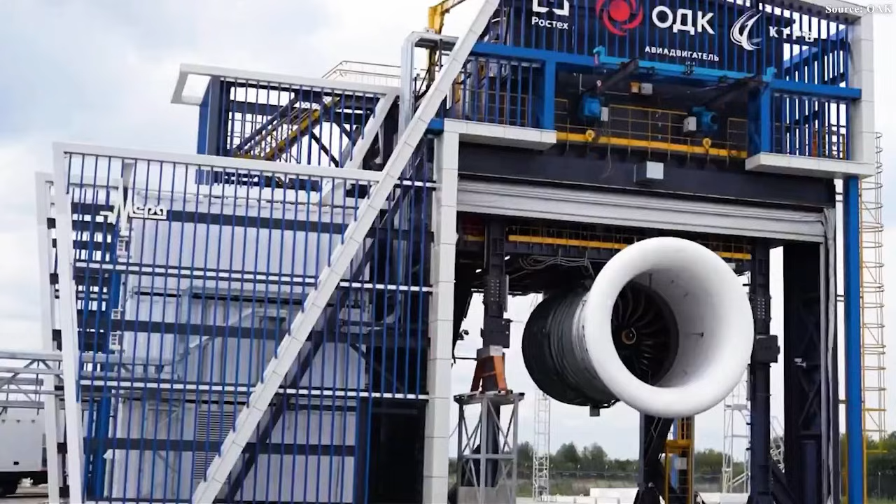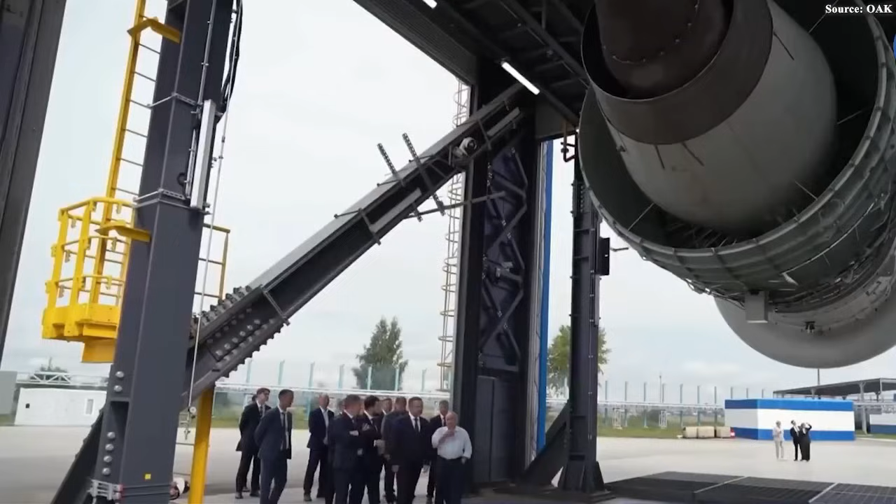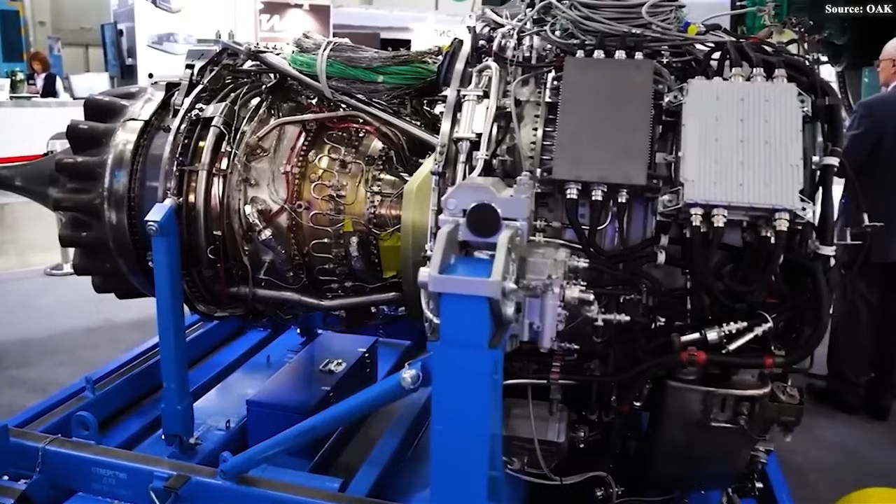What truly unsettles the West is a rival that rose under imperfect conditions. It's a country boxed in by sanctions, cut off from supply chains, and still pushing forward anyway. That country is Russia. For decades, large jet engines were considered an exclusive Western domain, controlled by a small club of manufacturers that set the rules for global aviation. But quietly, far from airshows and glossy marketing campaigns, Moscow has been working on something that challenges that assumption.

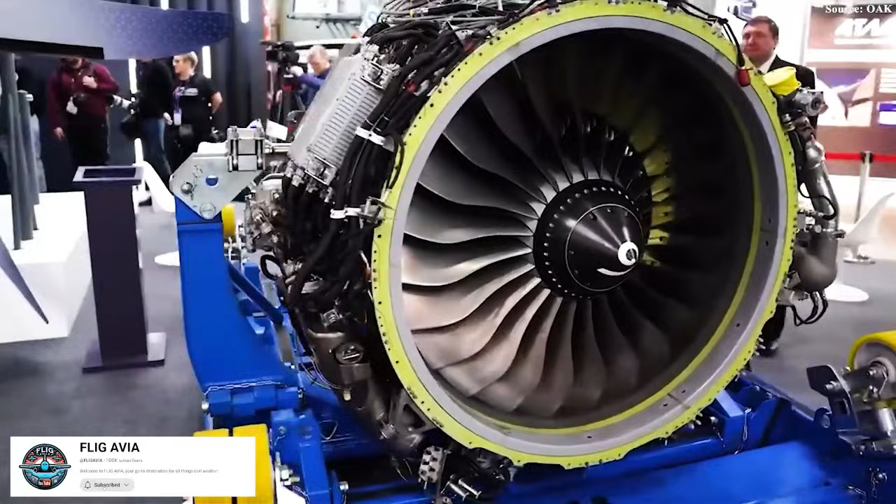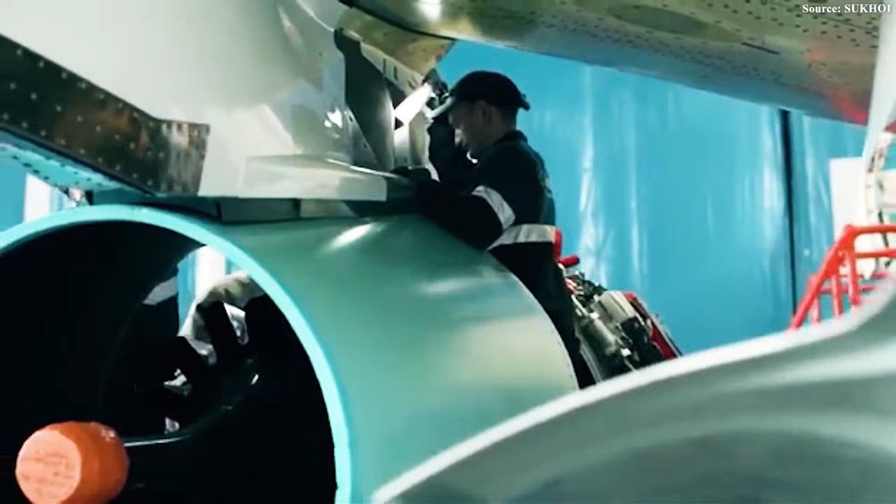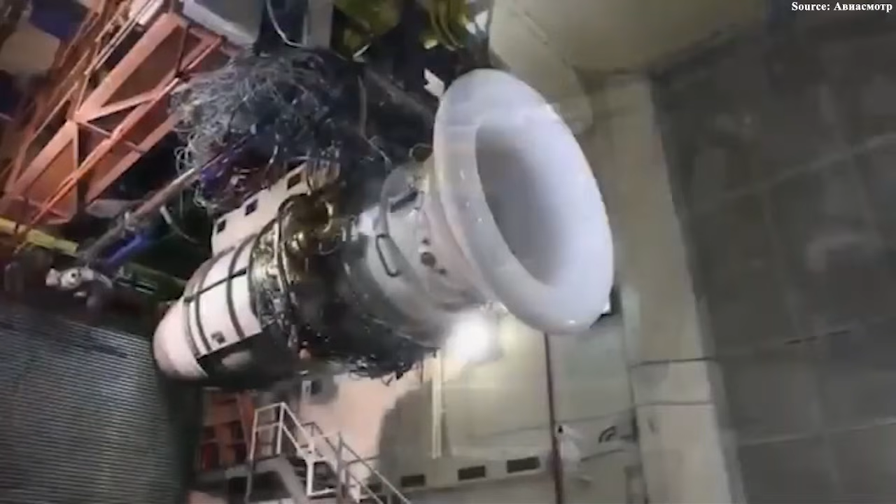Its name is PD-26. And while it hasn't flown yet, the very fact that it exists is already forcing uncomfortable questions. The PD-26 isn't just another engineering project. It's Russia's clearest attempt so far to reclaim independence in one of the most complex industries on Earth. Developed under the umbrella of United Engine Corporation, the engine is designed as a high-bypass turbofan, producing roughly 26 tons of thrust. That number matters.

It places the PD-26 squarely in the wide-body category, a space long dominated by Western engines powering aircraft from Boeing and Airbus. This isn't about regional jets or niche platforms. It's about competing where the stakes are highest. From the outset, the ambition behind PD-26 has been clear. It's intended to power future wide-body passenger aircraft, heavy freighters, and even large military transport planes.

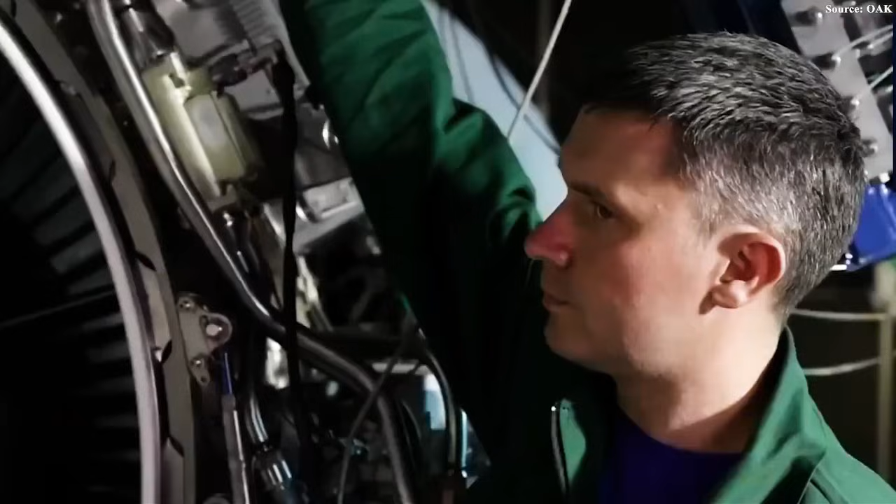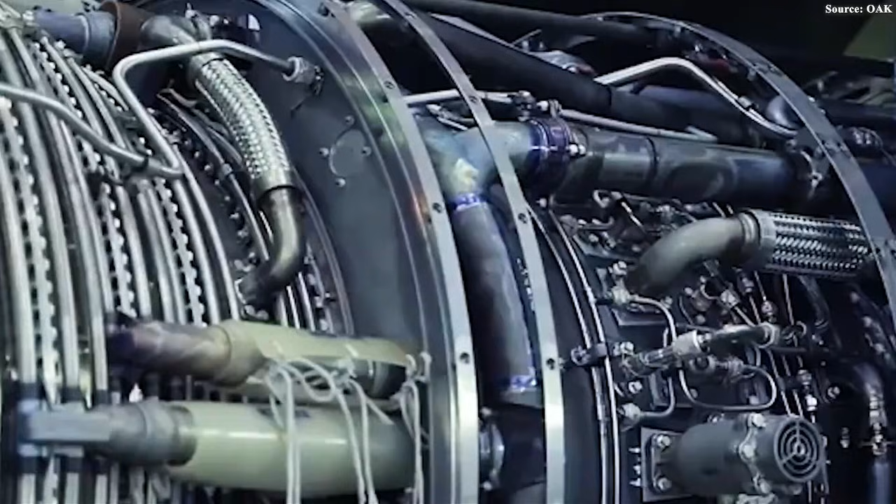With a bypass ratio estimated between 8.5 and 9.0 and a fan diameter approaching 3 meters, the design targets long-range efficiency rather than brute force. Engineers are aiming for a cruise fuel consumption improvement of up to 20% compared to older Russian engines like the PS90A. On paper, those numbers would place it much closer to modern Western standards than anything Russia fielded before. But the more interesting part is how they're trying to get there.

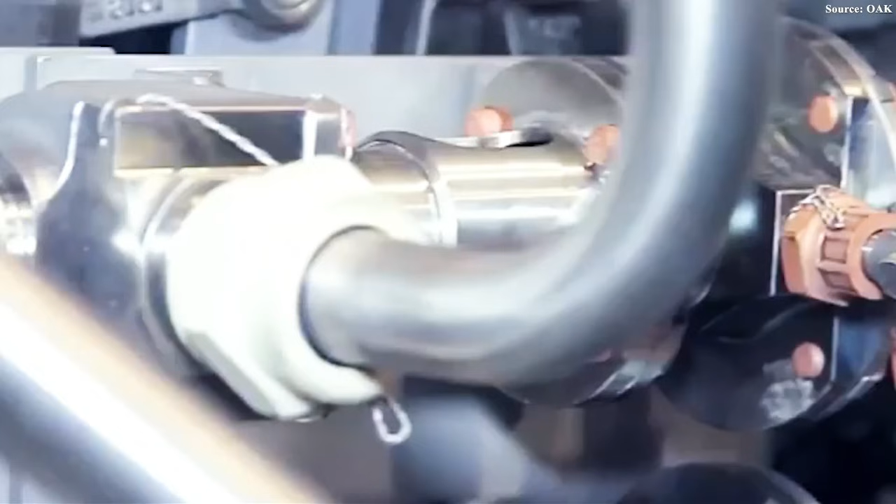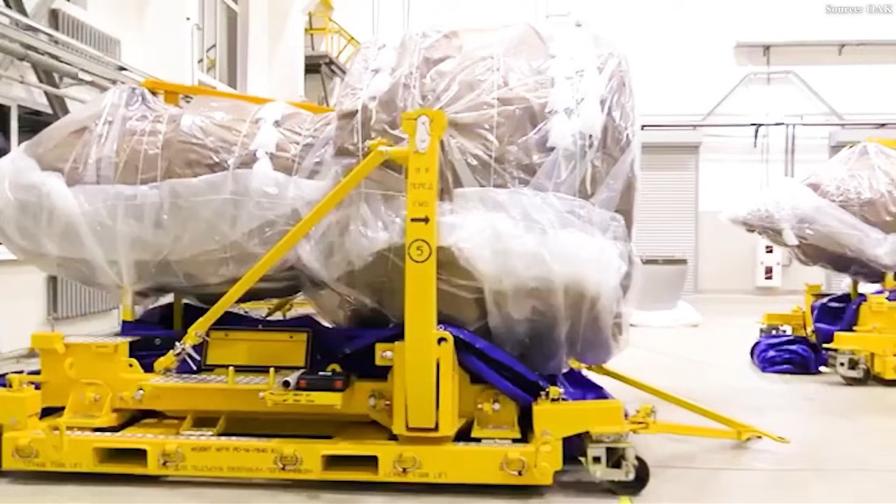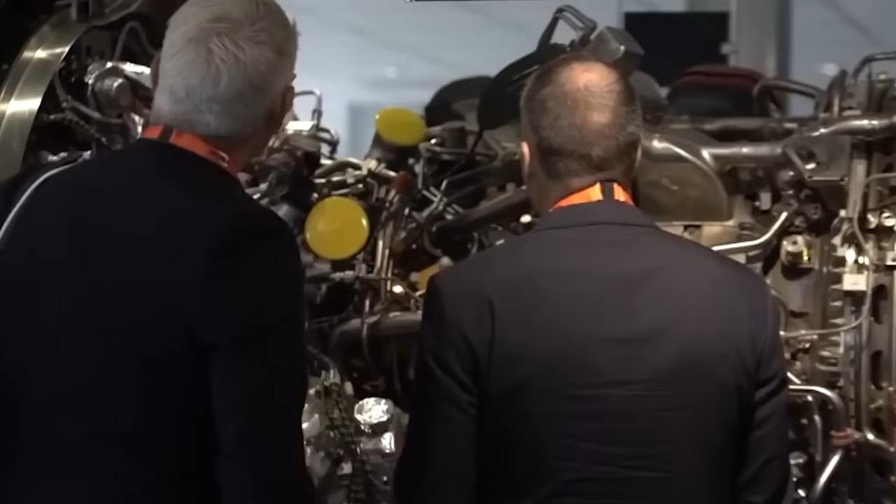Unlike many past Russian programs, PD-26 isn't being built from scratch. Instead, it's a calculated blend of what already works. Its DNA traces back to the PD-14, a smaller engine that achieved certification and now flies on the MC-21. That program gave Russian engineers something they hadn't had in decades: real, modern experience with civilian certification, composite fan blades, digital engine controls, and high-temperature turbine materials.

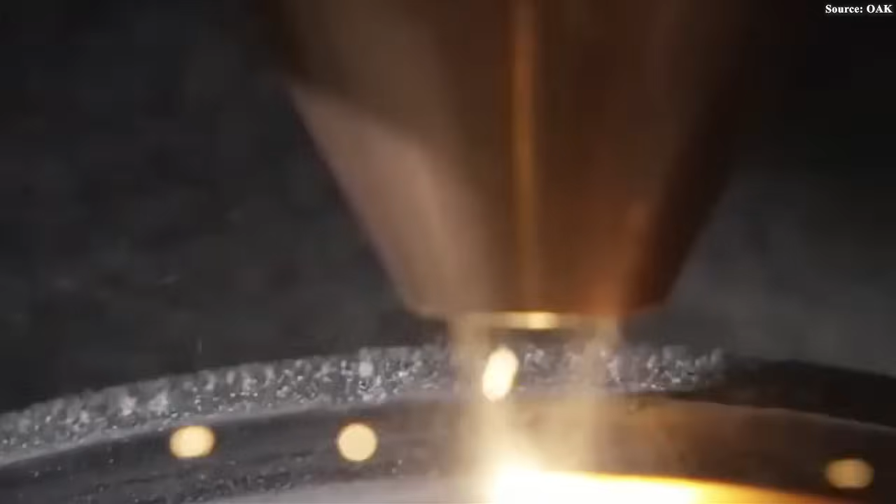At the same time, PD-26 borrows heavily from the much larger PD-35 program, especially its gas generator core and advanced turbine technologies. The result is a modular design meant to scale efficiently across multiple thrust classes. And that decision wasn't just technical, it was strategic. As of now, PD-26 remains in the pre-prototype phase. Ground testing is expected in the late 2020s, with flight testing planned shortly after. Even under optimistic scenarios, certification wouldn't come until the early 2030s.

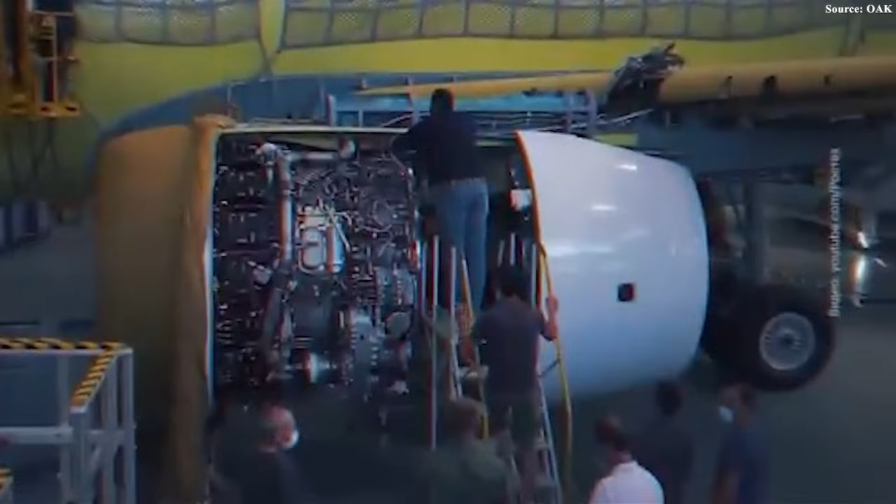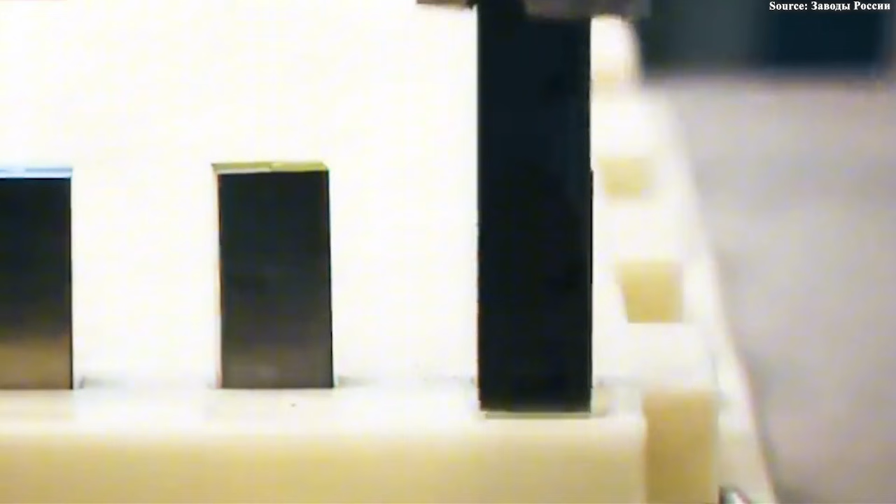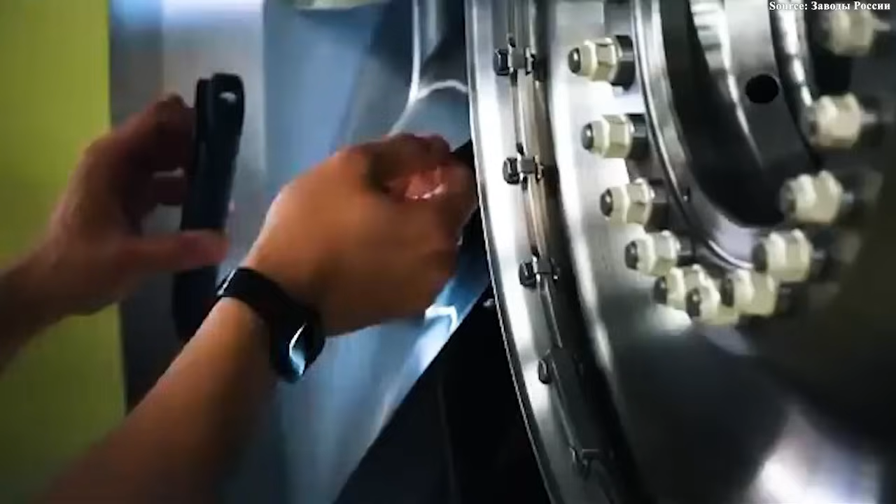Yet despite those timelines, the engine is already being discussed as if it were inevitable. That's because PD-26 is less about speed and more about survival. And to understand why, you have to look backward. Russia's jet engine industry didn't start from nothing. During the Soviet era, it produced world-class designs like the D-30 and AL-31, engines that powered everything from civilian airliners to frontline fighters. But the collapse of the Soviet Union in 1991 shattered that ecosystem.

Funding evaporated. Skilled engineers left. Factories aged without modernization. By the 2000s, Russia had become deeply dependent on foreign suppliers, relying on Ukraine for helicopter engines and Western firms like Pratt and Whitney and Safran for critical civil aviation components. That dependence worked until it didn't. The turning point came in stages. First, in 2014, when sanctions following Crimea exposed how fragile Russia's supply chains really were.

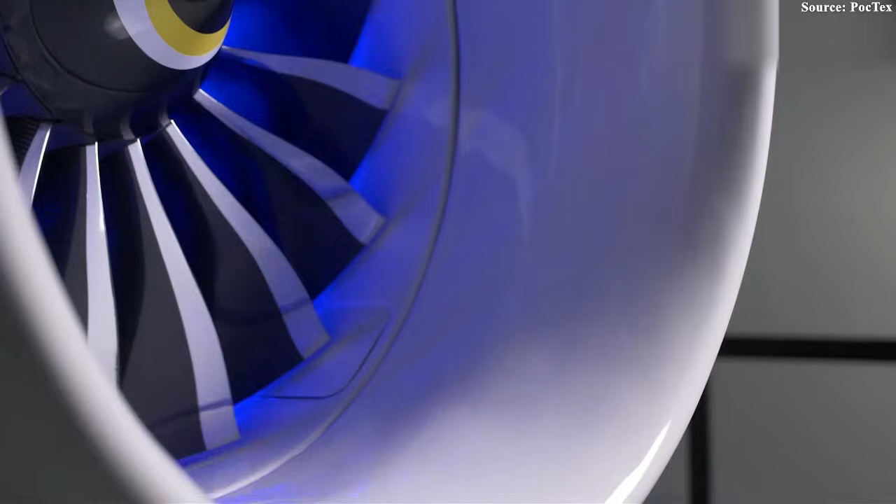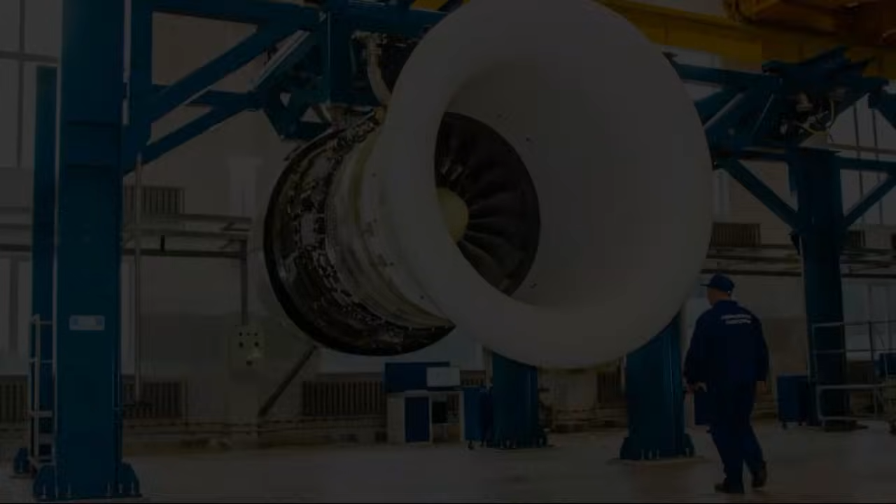Then, in 2022, when the scale of restrictions exploded. Export controls cut off access to advanced machine tools, electronics, and precision components almost overnight. Estimates suggested that up to 70% of imported inputs used in Russian aviation programs suddenly became unavailable. Civil aviation was hit immediately. Aircraft were grounded for lack of spare parts. Leasing agreements collapsed, and at the same time, military demand surged.

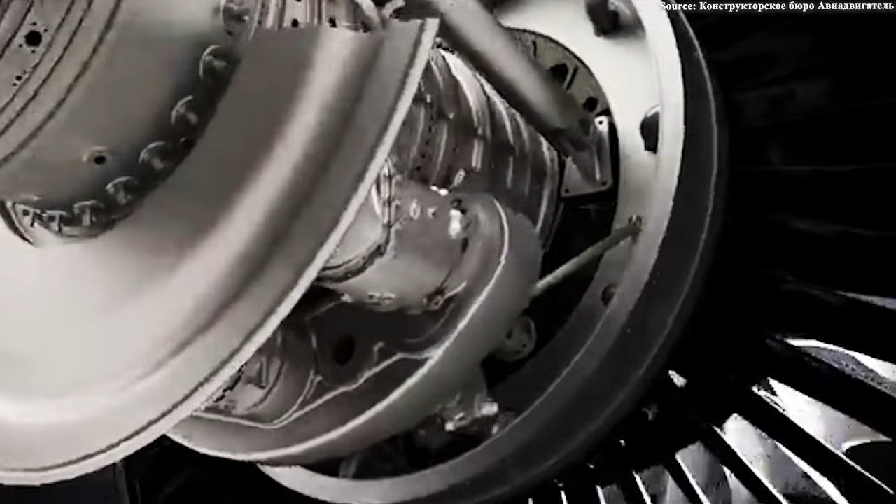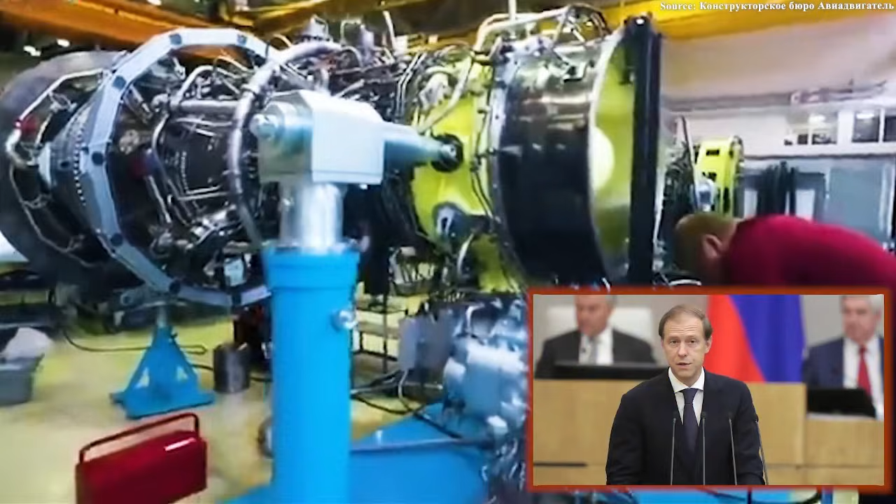Transport aircraft like the IL-76 and IL-96 became more important than ever, supporting logistics under wartime conditions. That pressure forced Moscow to confront a hard truth. Import substitution was no longer a policy preference. It was a necessity. In public statements, Denis Manturov made that shift explicit.

Calling for full localization in defense industries without sacrificing quality. It was a bold demand, and many inside Russia quietly doubted it was achievable. But the direction was set.

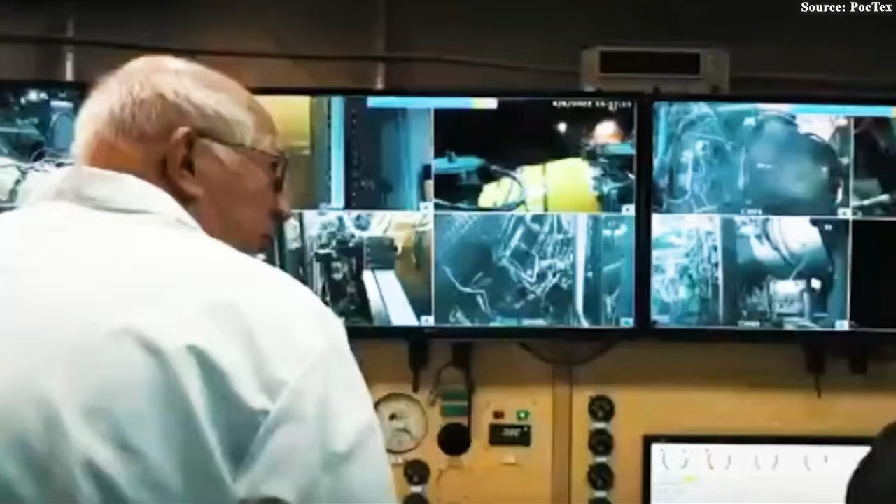The PD-35 program was supposed to be the crown jewel of this revival. Launched in the mid-2010s, it targeted an enormous thrust class of up to 35 tons and was intended to power the joint Russia-China CR929 widebody. The engine incorporated more than 20 advanced technologies, from ceramic matrix composites to next-generation digital controls.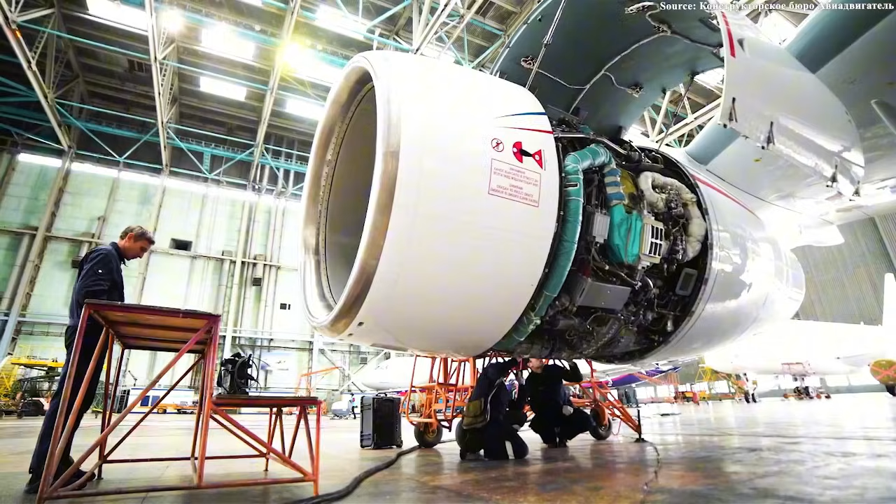In 2023, its gas generator core successfully ran on a test bench in Perm, proving that the core technologies worked, but geopolitics intervened. The CR929 partnership unraveled, and the justification for such a massive engine weakened. That's where PD-26 comes in. Instead of abandoning the investment, Russian engineers adapted.

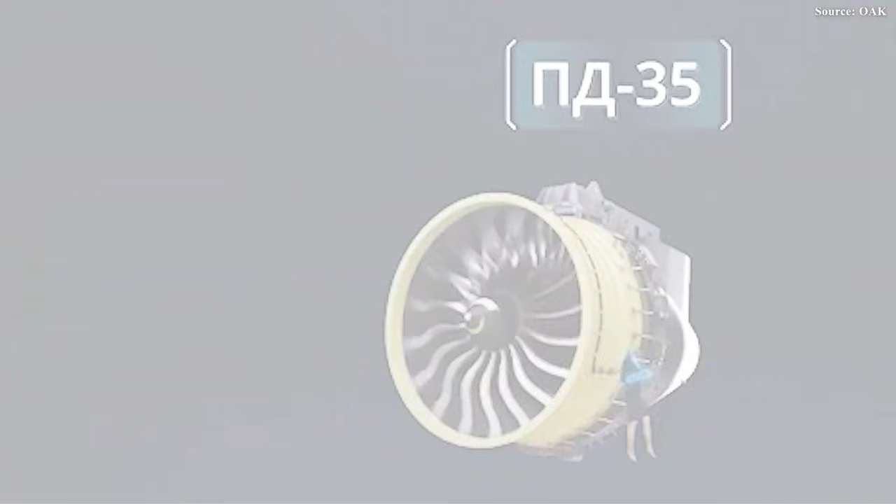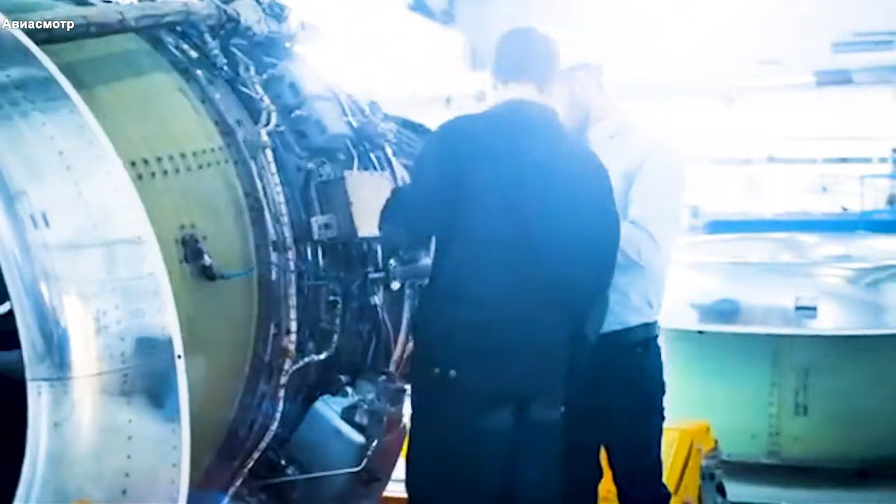They scaled down the PD-35 core, paired it with a smaller fan and low-pressure turbine, and created a more practical engine tailored to aircraft Russia actually plans to build. The modular approach promised to cut development costs nearly in half and shorten certification timelines. In other words, PD-26 wasn't born from ambition alone, it was born from compromise.

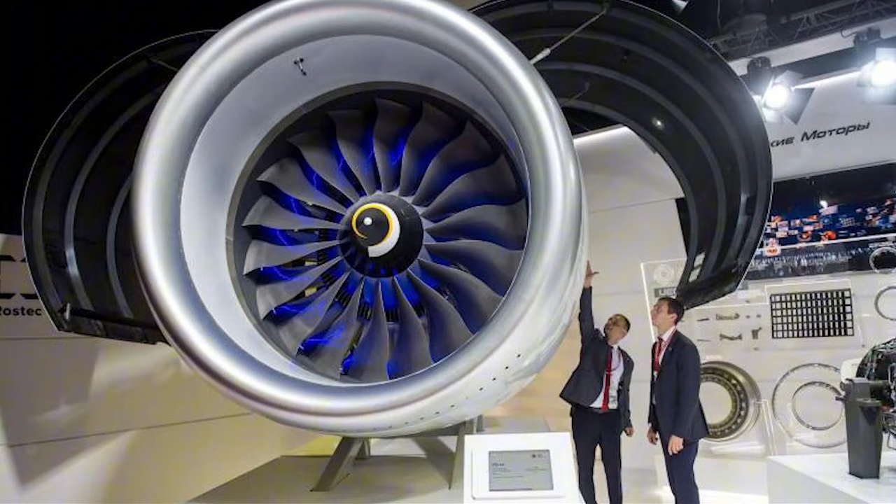Officially, the engine was unveiled in 2025. Within weeks, it received direct political backing, transforming it from a technical derivative into a strategic priority. The message was clear. This engine would move forward, delays or not.

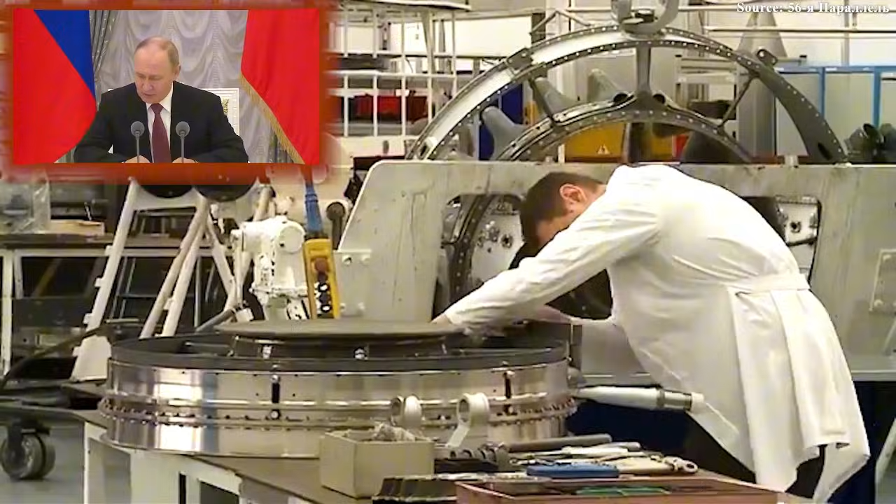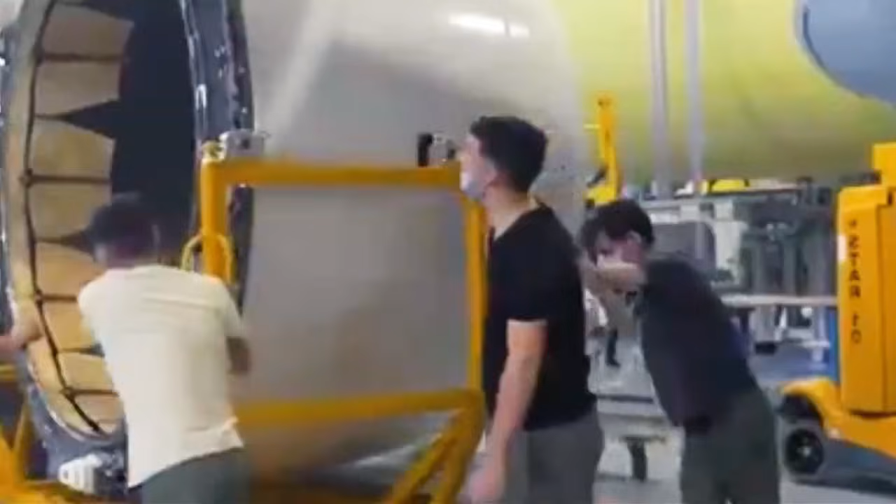Plans began circulating for flight testing on modified IL-76 platforms, using a mixed configuration with older engines on 3 pylons and the PD-26 on the 4th. It's a cautious approach, but also a telling one. Russia isn't trying to leap ahead. It's trying not to fall out of the race entirely.

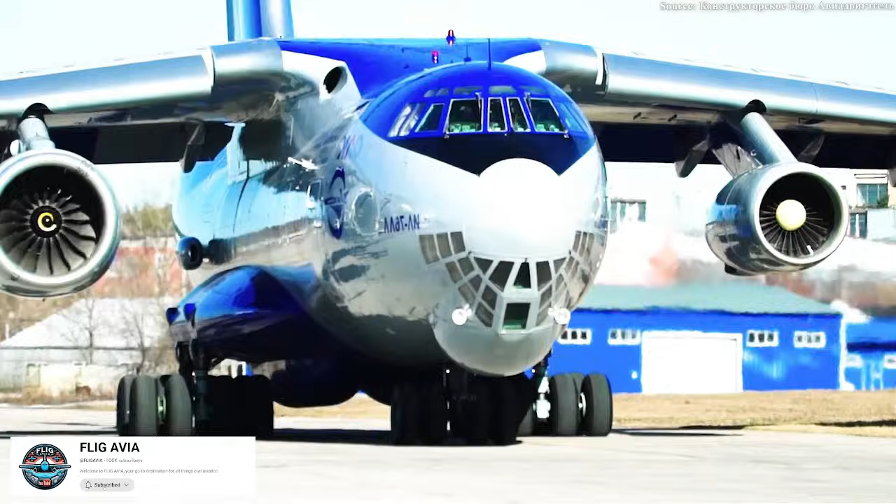Still, the challenges are immense. Production capacity remains a bottleneck. Even the PD-14, Russia's most successful modern civil engine, has struggled to reach more than a few dozen units per year. Precision manufacturing, especially for turbine blades and high-temperature components, remains constrained by sanctions and aging equipment.

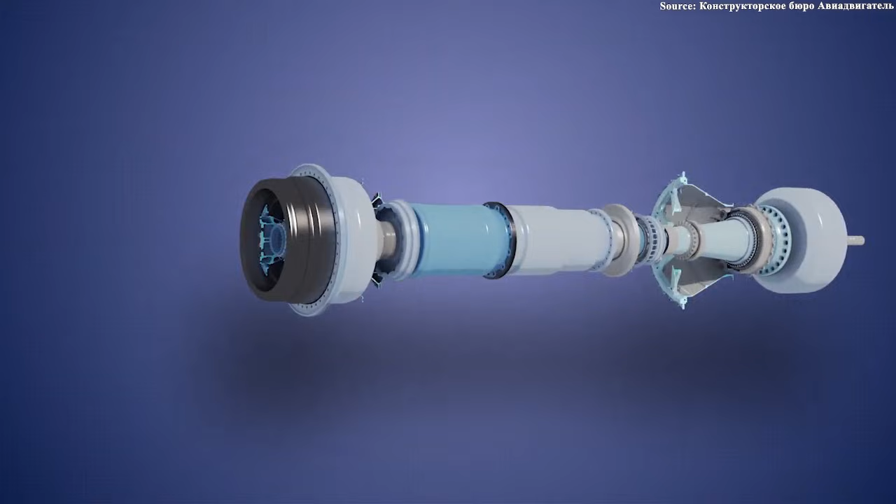Skilled labor shortages persist as experienced engineers retire or leave. These aren't minor hurdles. They're structural limits that no amount of political pressure can fully erase. And yet PD-26 continues, because its value isn't measured only in thrust or efficiency. Geopolitically, it signals defiance of Western efforts to isolate Russian high-tech industries. Economically, it's meant to stabilize an aviation sector worth billions and preserve industrial jobs.

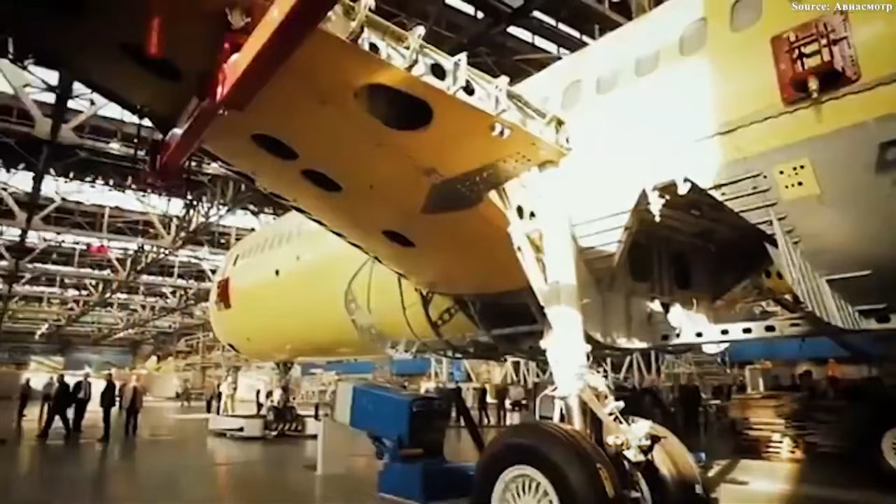Militarily, its dual-use design supports heavy airlift capabilities Russia cannot afford to lose. Critics argue it's symbolic, a prestige project in a strained economy. Supporters claim it proves sanctions have forced innovation rather than collapse.

In the end, PD-26 represents something larger than itself. It's a test of whether a modern, highly complex technology can be sustained under long-term isolation. Not whether Russia can surpass the West, but whether it can remain technologically relevant at all. The engine's first flight, whenever it happens, won't just be an engineering milestone. It will be a verdict on an entire strategy.

And until that verdict arrives, PD-26 remains suspended between ambition and reality, quietly challenging assumptions that many thought were settled long ago. That tension between ambition and reality is exactly where the PD-26 story becomes more than an aviation project. It becomes a window into how Russia is reshaping itself under pressure.

What looks like a technical decision on paper is actually part of a much broader shift, one that economists and strategists increasingly describe as a fortress economy. In this model, efficiency takes a backseat to endurance and access is replaced by control. The PD-26 fits neatly into that logic.

Geopolitically, the engine sends a message far beyond Russia's borders. By pressing ahead with a high-thrust turbofan under sanctions, Moscow is signaling to non-Western partners that advanced aerospace development doesn't have to run through Washington or Brussels.

This narrative is especially aimed at countries within the BRICS bloc and others navigating their own uneasy relationships with the West. Even though the joint wide-body ambitions with China faded, the underlying idea remains: technological autonomy as leverage. PD-26 becomes a proof of concept, not necessarily of superiority, but of independence.

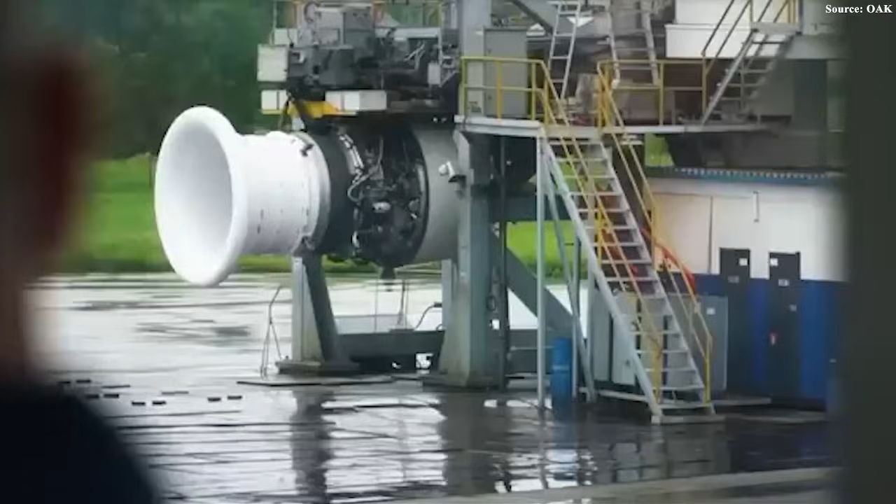Economically, the stakes are just as high. Russia's civil aviation sector has been hit from every angle: shrinking fleets, grounded aircraft, and rising maintenance costs. Airlines have been forced to cannibalize planes for spare parts, a practice that buys time but not stability.

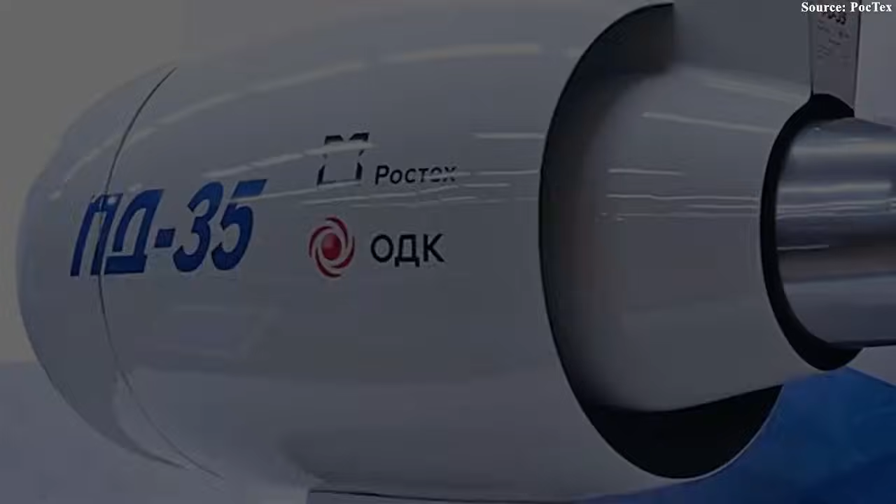The PD-26 is meant to anchor a longer-term recovery, one tied to a broader push to field hundreds of domestically built aircraft over the next decade. On paper, this would keep factories running, preserve skilled jobs, and reduce reliance on foreign suppliers. In reality, it hinges on whether production rates can ever match political promises.

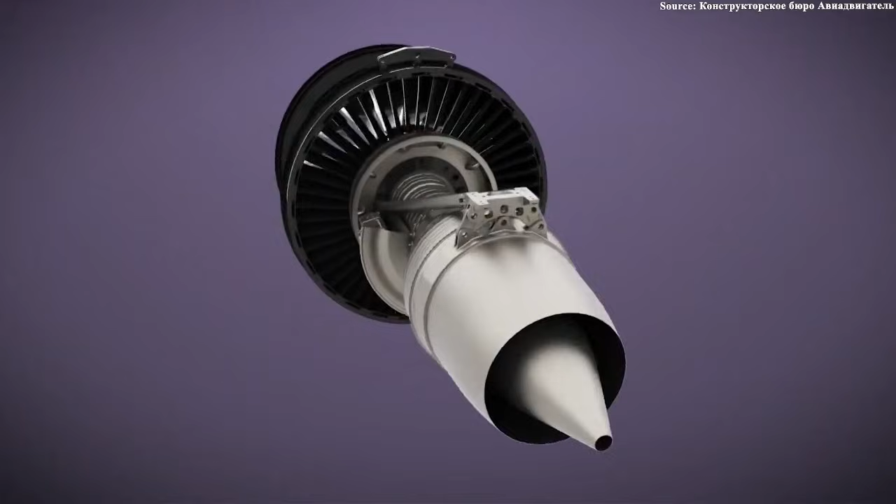Then there's the military dimension, which often goes unstated but is impossible to ignore. Heavy airlift has become a strategic priority, especially as operational demands increase and legacy platforms age.

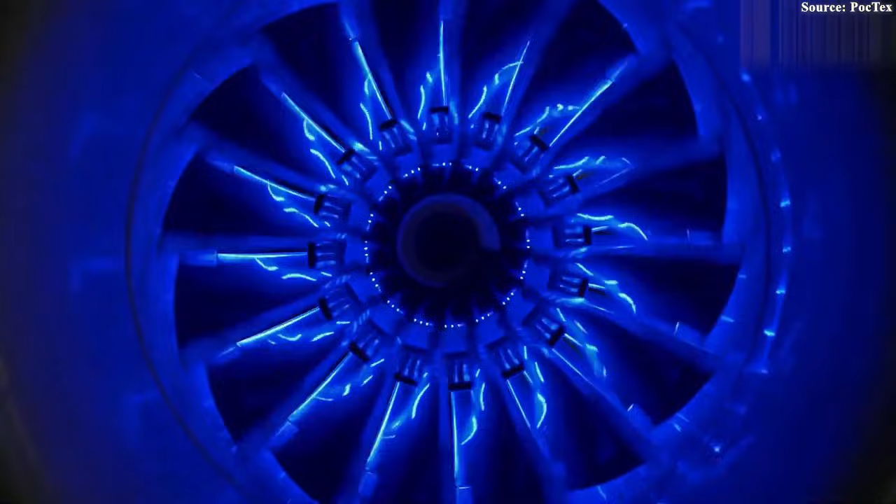Still, skepticism persists, even within Russia. Analysts point out that sanctions didn't just remove access to components, they disrupted entire ecosystems of quality control, certification, and supplier accountability. Rebuilding that from scratch is slow and expensive. Parallel imports and indirect supply routes can fill some gaps, but they don't replace deep industrial integration.

And while officials often highlight breakthroughs, production statistics tell a more restrained story. Output growth remains uneven, and delays are quietly acknowledged behind closed doors. This is where PD-26 becomes a gamble, not a reckless one, but a calculated risk. By scaling down from the ambitious PD-35 rather than starting over, Russia is betting that incremental progress can outpace isolation.

The modular approach allows lessons from one engine to feed directly into another, spreading risk across programs. If PD-26 succeeds even partially, it could stabilize the entire domestic engine family. If it stalls, it may expose just how narrow the margin has become.

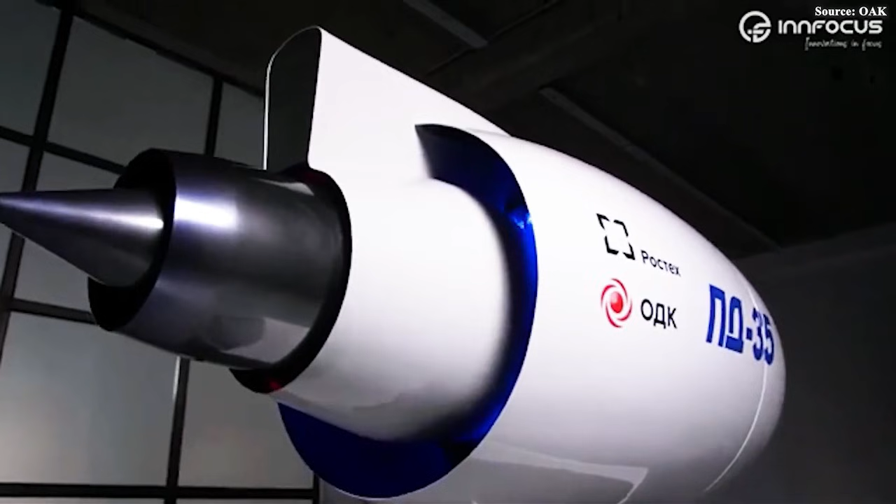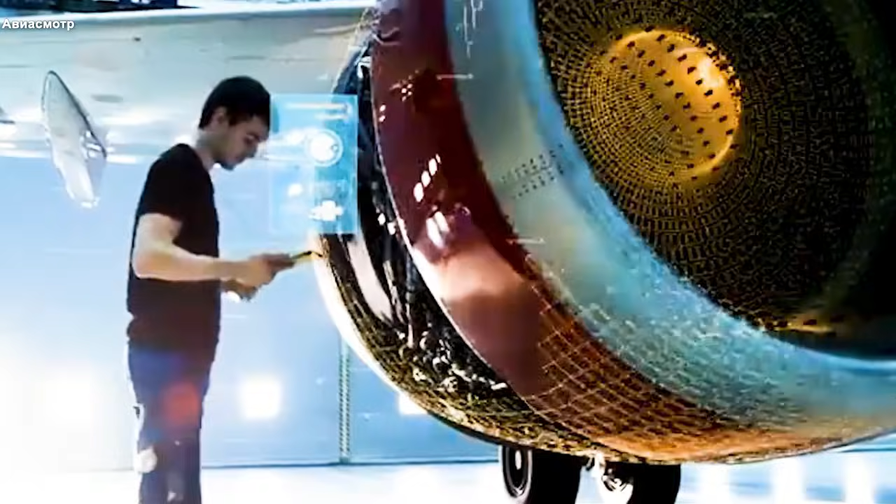What's striking is how little room for retreat remains. Unlike earlier programs that could be shelved or delayed without immediate consequences, PD-26 is now tied to national strategy. Funding, political credibility, and industrial survival are all wrapped into its outcome. That pressure cuts both ways. It accelerates decisions, but it also magnifies failure.

In the coming years, attention will shift from announcements to test data. Bench runs, thermal limits, vibration profiles, and fuel efficiency curves will matter far more than speeches. A single successful flight test will be celebrated as a breakthrough. A setback will raise questions that can't be dismissed as propaganda. The world won't need to guess how this story is going. The results will be visible, measurable, and hard to spin.

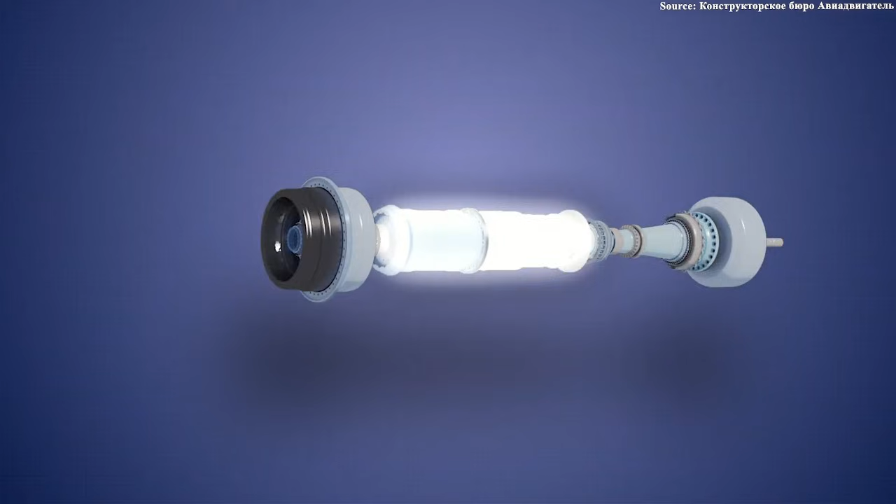So when people ask what truly makes the West uneasy, it may not be the PD-26 itself. It's the precedent it represents. A reminder that pressure doesn't always produce collapse. Sometimes it produces adaptation. Whether that adaptation is sustainable is still an open question. But one thing is already clear. The era where Russia's aerospace ambitions could be dismissed outright is over. The real test isn't whether PD-26 flies. It's what happens if it does.

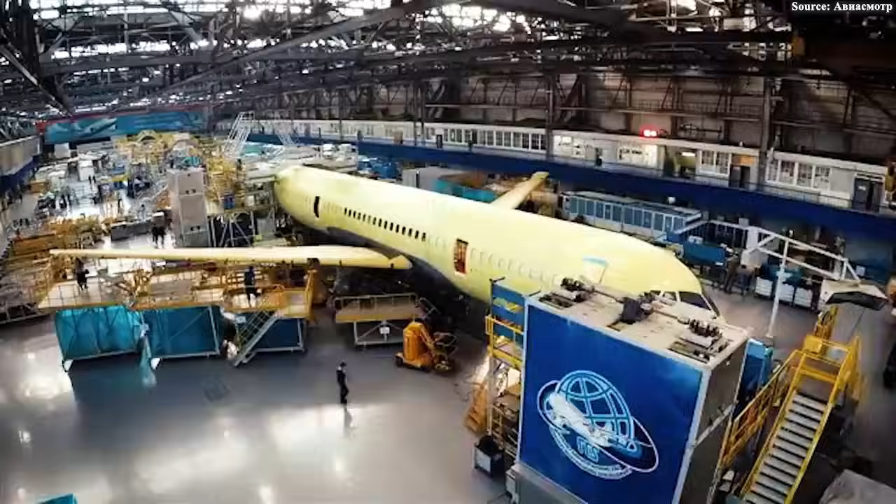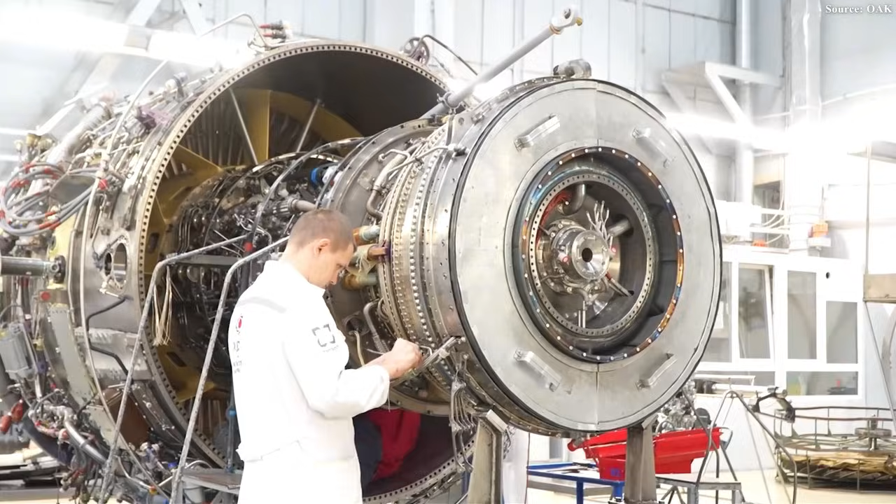And if it does fly, the consequences won't be immediate or dramatic. There won't be a sudden collapse of Western engine makers or a reshuffling of the global aviation order. What will change is something quieter, but far more important: assumptions. For decades, aerospace power has been tied to access. Access to global supply chains, to Western certification systems, to precision tooling scattered across multiple countries. PD-26 challenges the idea that losing that access automatically ends the game.

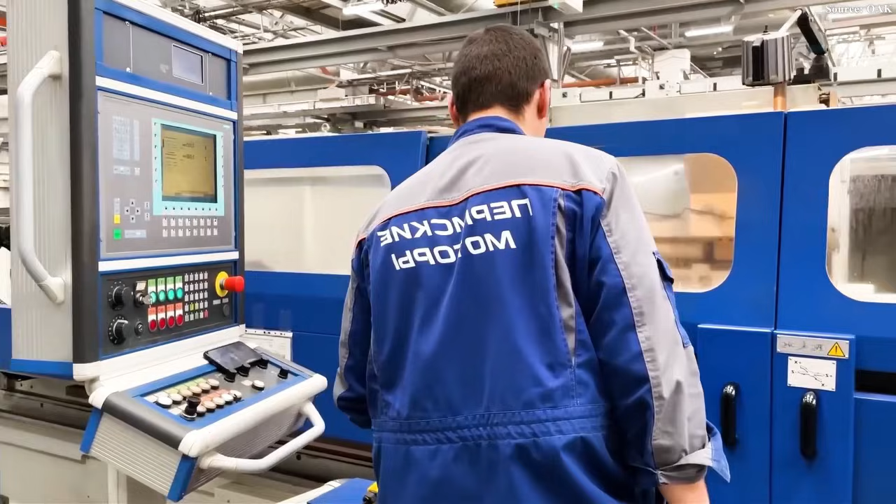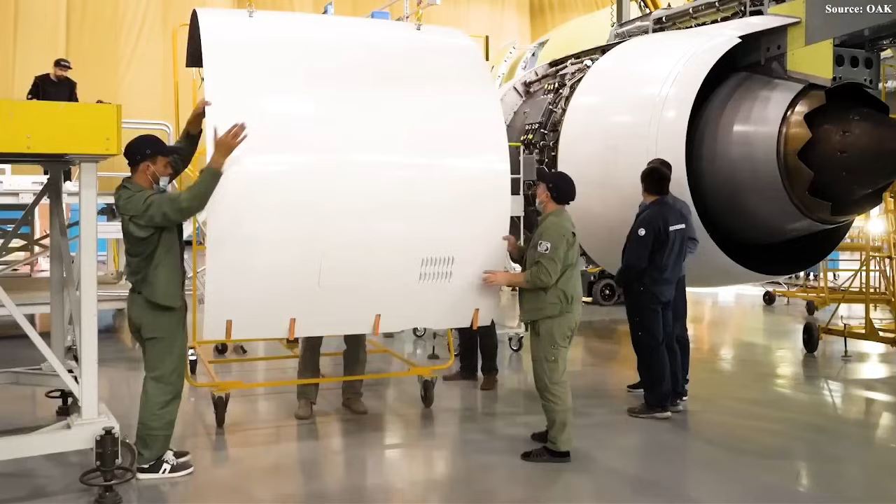That's why many analysts argue the real impact of PD-26 won't be measured in sales or exports, at least not at first. It will be measured in confidence. Confidence inside Russia's own industrial base that complex systems can still be built domestically. Confidence among non-Western states watching closely, wondering how vulnerable their own industries might be under pressure. And confidence, or lack of it, within Western policy circles about how effective long-term technological isolation truly is.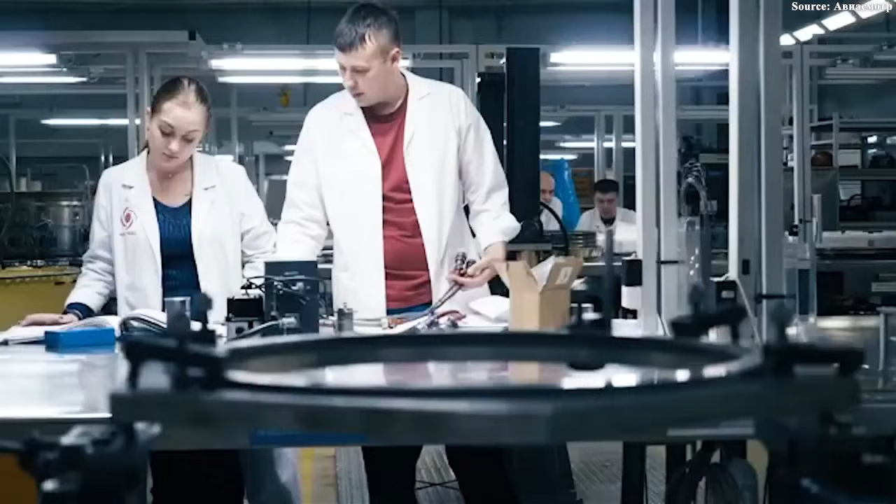At the same time, expectations around PD-26 are being carefully managed. Officials no longer speak in terms of rapid dominance or global market takeover. Instead, the language has shifted toward reliability, sufficiency, and continuity. That change matters. It signals a recognition that the goal is no longer to outcompete the West on its own terms, but to survive outside those terms altogether. In that sense, PD-26 isn't a challenger to Western engines like the GE90 or Trent families. It's an alternative path.

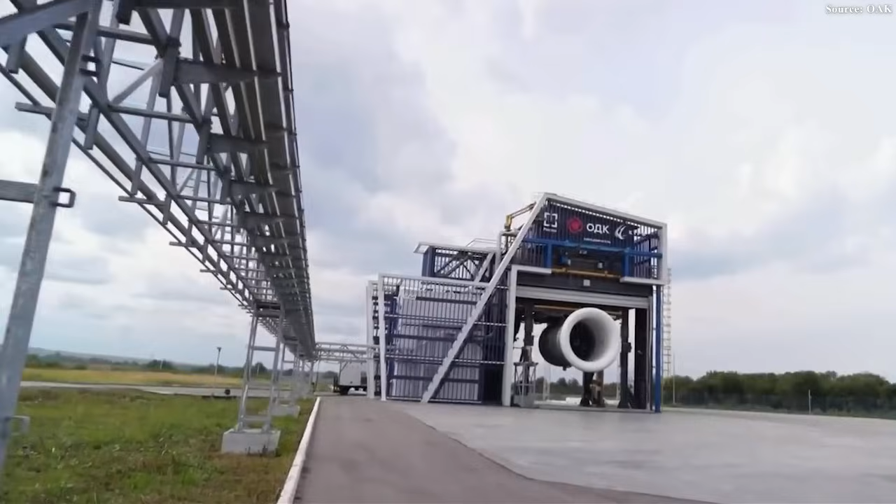There's also a generational aspect that often goes unnoticed. Many of the engineers working on PD-26 are part of a cohort that entered the industry during the PD-14 program. They didn't inherit Soviet-era design philosophies directly. They learned within a modern certification environment, constrained, imperfect, but closer to international standards than anything Russia had before. PD-26 is their first chance to apply those lessons at scale. Whether they succeed or stumble will shape the next 20 years of Russian engine design. Still, the risks remain unavoidable.

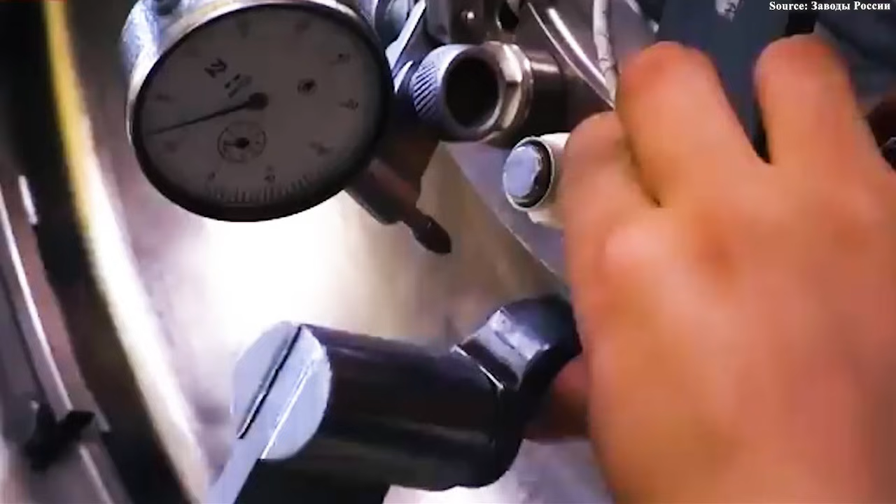If certification drags on into the mid-2030s, the engine may enter service already technologically dated. If production never scales beyond small batches, its strategic value shrinks. And if quality issues emerge under operational stress, confidence could evaporate quickly. These aren't hypothetical concerns. They are the same pitfalls that have plagued complex aerospace programs worldwide, even under far more favorable conditions. Yet, despite all of this, PD-26 keeps moving forward.

Slowly, methodically, without the fanfare that usually accompanies aerospace breakthroughs. That, in itself, is telling. It suggests a program no longer driven by image, but by necessity. A project designed not to impress the world, but to ensure that Russia can still move people, cargo, and power through the air on its own terms.

In the end, PD-26 may never become a household name. It may never power aircraft seen at major international airports. But its significance doesn't depend on visibility. It depends on function. If it works, even imperfectly, it will validate a strategy built on endurance rather than integration. If it fails, it will expose the hard limits of isolation in an industry that tolerates very little margin for error. Either way, the message is already out there.

Russia isn't waiting for conditions to improve. It's adapting to the conditions it has. And PD-26 stands as one of the clearest symbols of that adaptation. Not as a declaration of victory, but as a statement of intent. The kind that doesn't fade quickly, no matter how the final chapter is written.

That intent becomes even clearer when you look at how quietly this program is being handled. There's no glossy rollout, no exaggerated timelines, no claims that the PD-26 will instantly rewrite aviation history. Instead, the messaging is restrained, almost cautious, and that restraint itself is unusual. It suggests the people closest to the program understand exactly how narrow the margin for error is. In aerospace, especially at this level, promises are cheap.

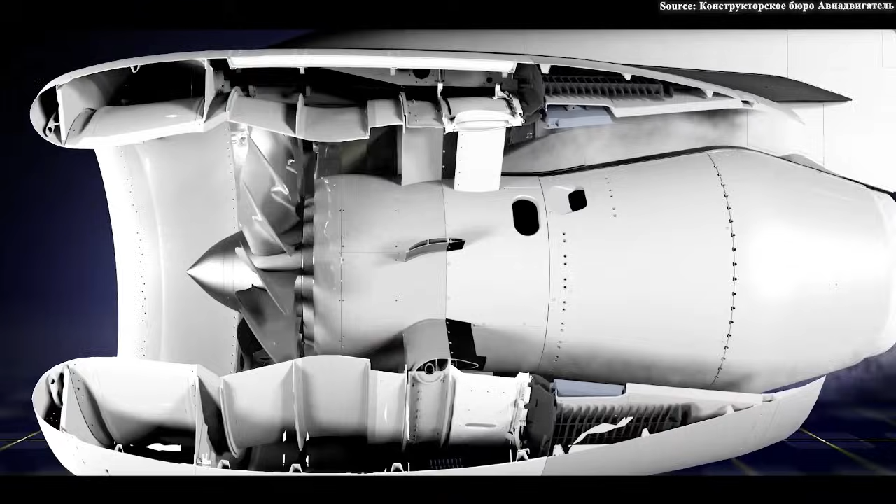Data isn't. What happens next will unfold in stages that don't make headlines. Metallurgy tests, stress cycles, long-duration bench runs designed to expose flaws rather than hide them. Each of these steps will determine whether PD-26 remains a political symbol or becomes an operational tool. And unlike consumer technology, there's no shortcut here. You can't rush an engine that's expected to operate for tens of thousands of hours without failure.

Another overlooked factor is certification. Even if Russia certifies the PD-26 domestically, international acceptance is a different matter entirely. Without validation from Western aviation authorities, the engine's export potential remains limited. That doesn't make it useless, but it does redefine its role. PD-26 isn't being built to conquer global markets in the near term. It's being built to ensure continuity at home, to keep aircraft flying, factories operating, and logistics moving without asking permission.

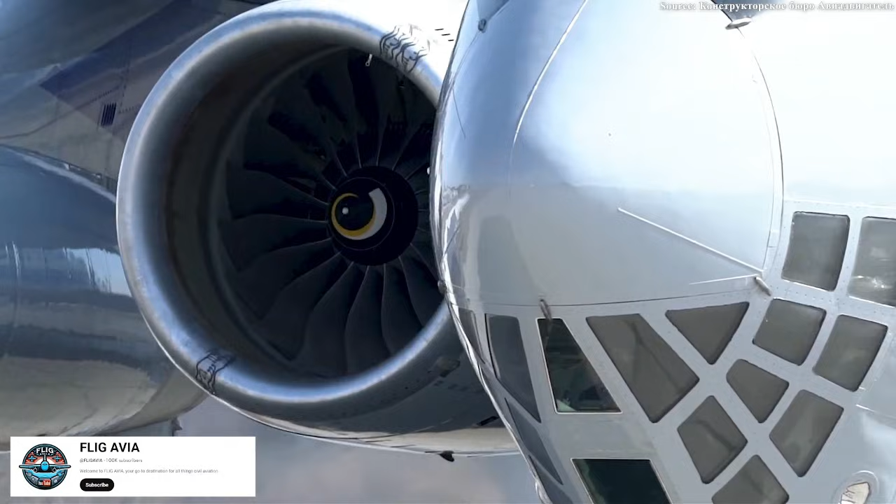This is where critics often miss the point. They frame PD-26 as an attempt to catch up to the West, but that's no longer the real objective. The objective is insulation, resilience, the ability to function when access is denied. By that metric, even a technically imperfect engine can be strategically successful if it meets minimum reliability and production thresholds.

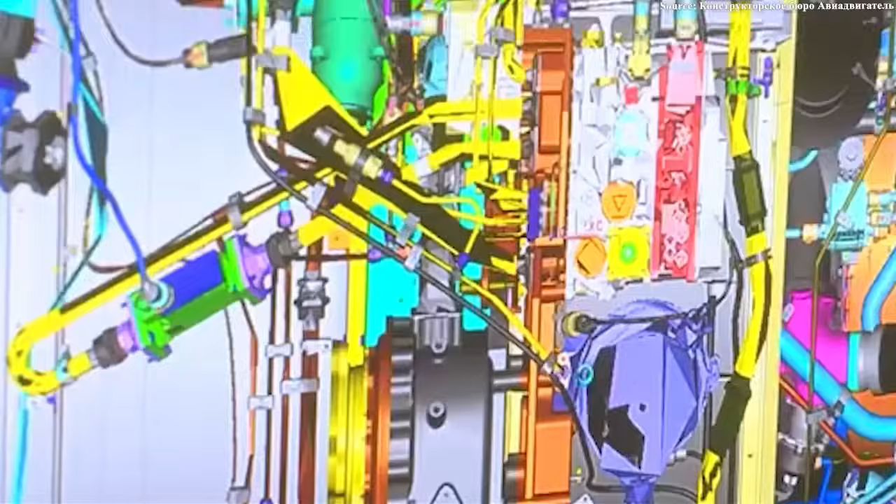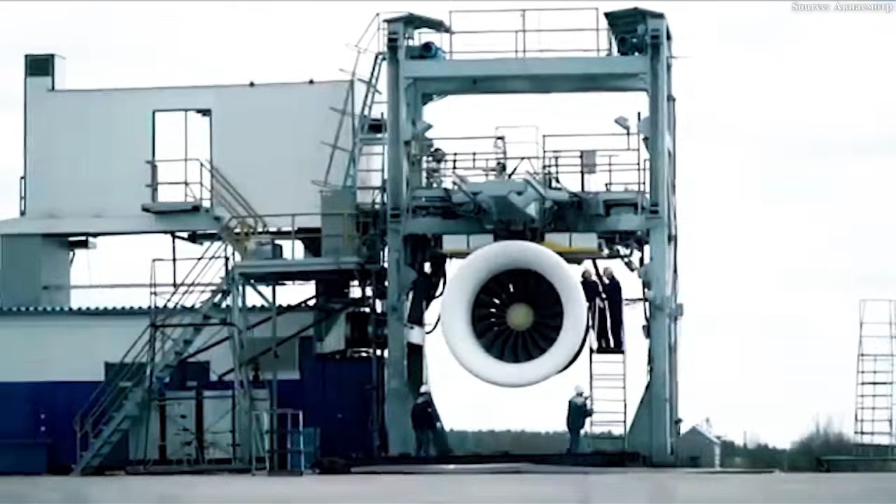And this mindset may be the most consequential outcome of all. If PD-26 proves viable, it reinforces a broader shift already underway across Russian industry, one where optimization is sacrificed for control and redundancy replaces efficiency. From an economic standpoint, that's costly. From a strategic standpoint, it's deliberate. The PD-26 isn't designed for a globalized world. It's designed for a fractured one.

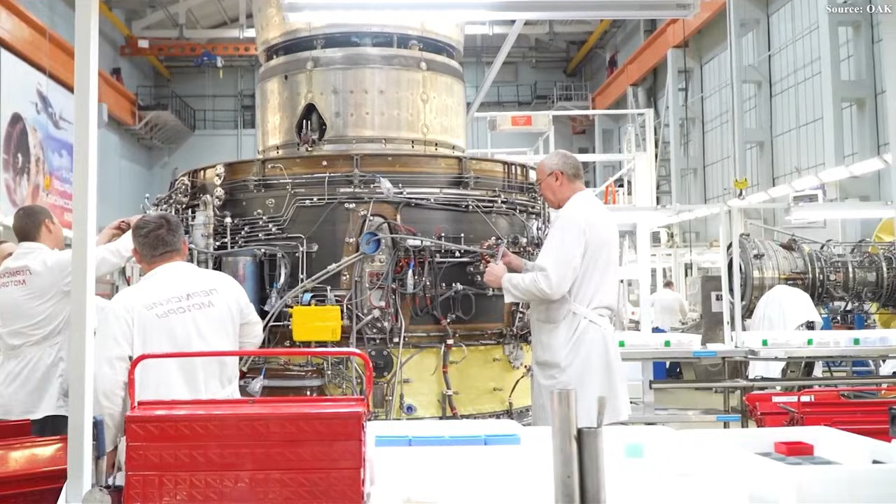Looking ahead, the first flight will be symbolic, but the real verdict will come years later, when the engine is asked to perform day after day under operational strain, when maintenance crews, not engineers, become its primary judges, when availability rates matter more than press releases. That's when the experiment truly begins. Until then, PD-26 exists in a liminal space, too advanced to dismiss outright, too early to declare a success.

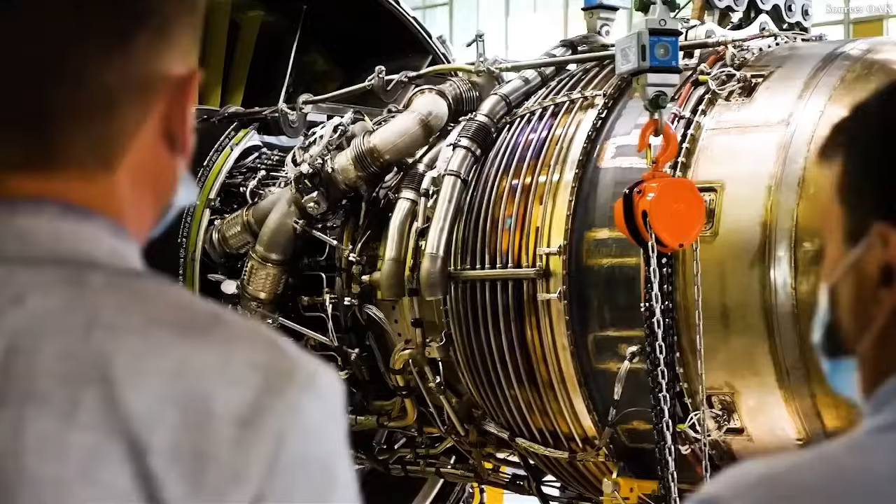It stands as a reminder that technological power doesn't disappear overnight, even under pressure. It adapts, reshapes, and redefines its goals. So the unease it creates isn't about fear of being overtaken. It's about uncertainty. About whether the tools long used to enforce dominance still work as intended. PD-26 doesn't offer an answer yet, but it forces the question to be asked. And in a world built on assumptions, that alone can be unsettling.